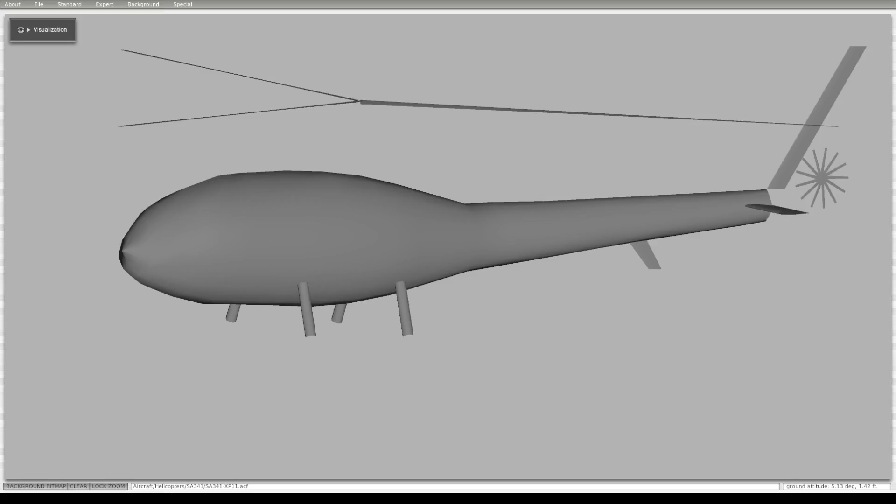So I guess the first thing that I really need to do is I need to get back into my side view, shift my view around, and I'll get my background images in there again, so I can properly try and align this under helicopters, SA341, doc, side. There we go. Alrighty, now what I have to do here is I have to zoom and move this around so that I've got it just so, and I think that's, no, that's definitely out a bit. That's looking a bit more like it.

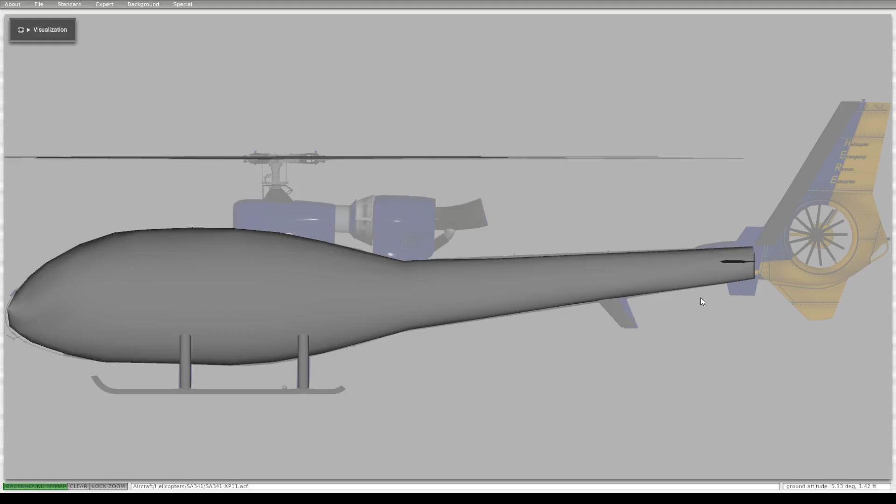Yeah. Alrighty, so what I'm going to try and do tonight, I'll probably only stream for an hour or so, but I might try and tidy up some of the polygons in here, as well as making this main rotor area and the engine cowling that we've got going on here. Got 2 bits of engine cowling. And I've seen some other helicopters actually use engine housing for this area here as well.

Another thing that I can do to assist is if I take that off and actually put the 3D model in there so that we can see how that operates. But it's always good to start with the background image. So I'm going to do that. Okay, so if we go into standard engine pylons, no, that's not what I want. I want fuselage miscellaneous bodies, engine nacelles. Right, so the body has this engine nacelle,

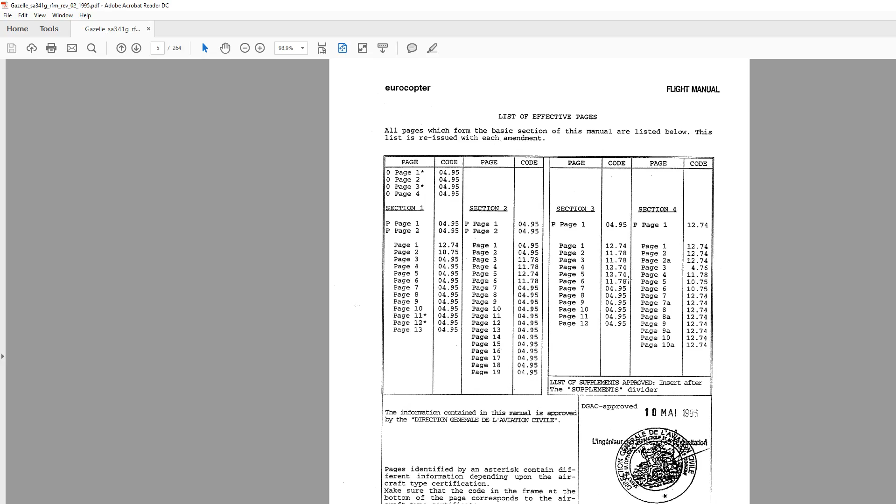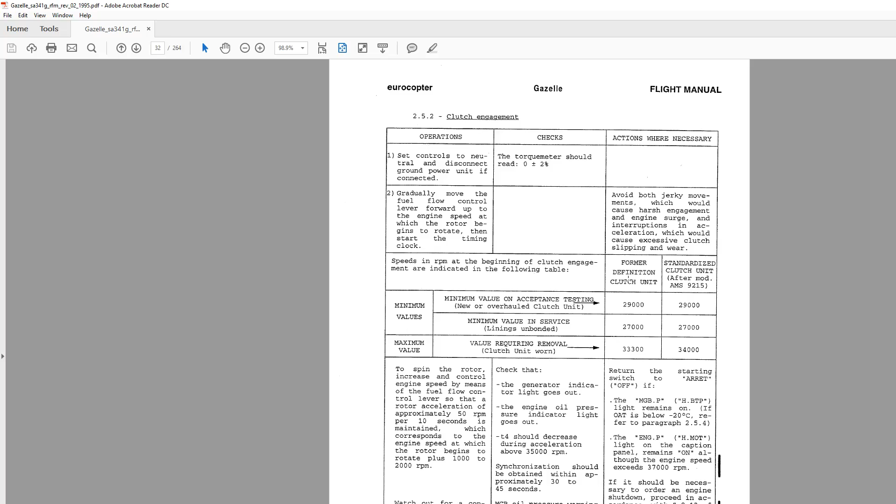and this is a really important thing to set first of all, is the number of stations, number of sides in the radius, and the body radius there. Now I'm probably going to have to guess here a little bit as to what those dimensions should be. So I've got a couple of documents here. So if I swap over here to the left screen and bring this back up, this is the documentation that we've got for the Gazelle. I don't think they actually have a lot in the way of dimensions for the engine housing. So that's what I'm just looking for.

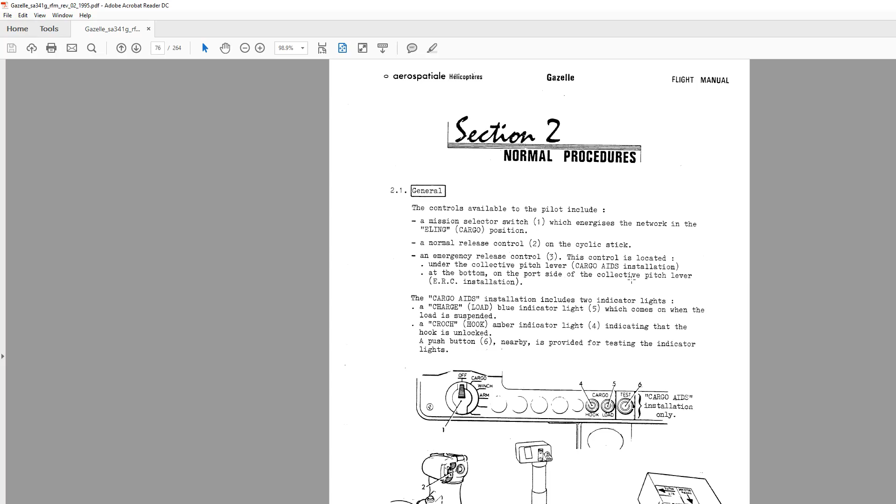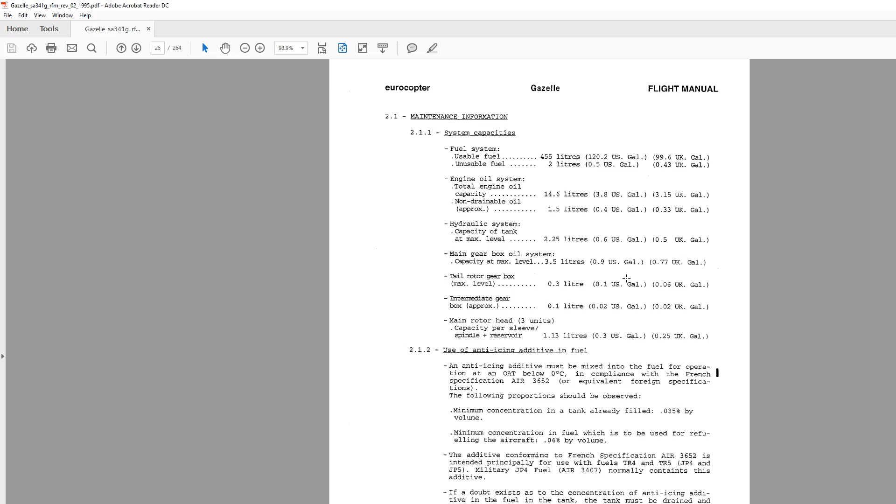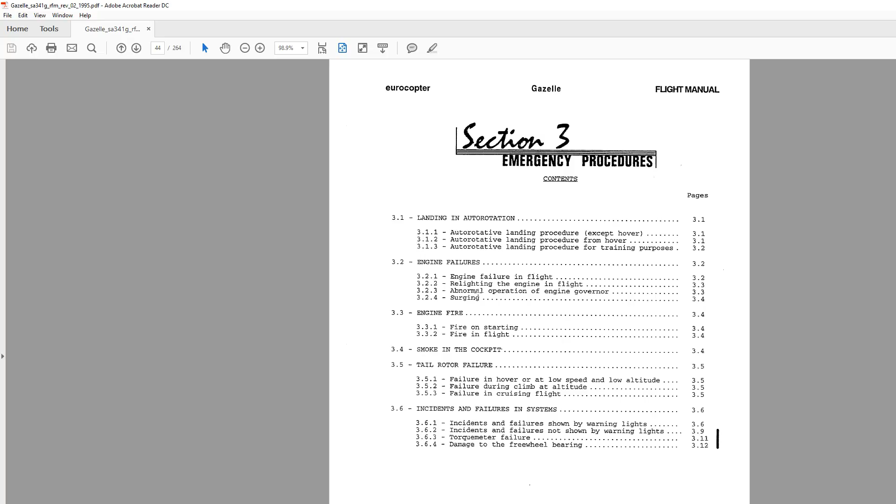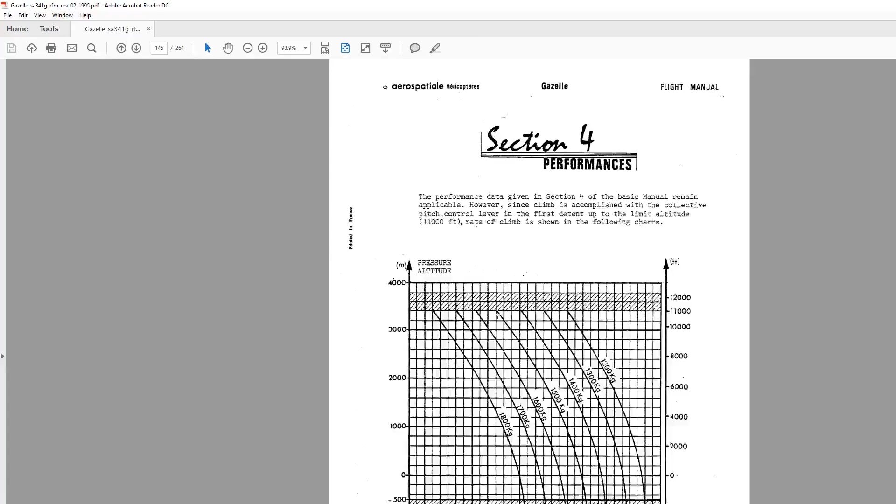I'm just going to one of the sections that I know that has limitations, normal procedures. Oh, these are the auxiliary additions. I think it must be back here. I think it's actually in section 2. No, section 2 is normal procedures. Must be section 3. No, that's the landing procedures, and that's the emergency procedures. So section 4. Correspondence diagram, no. These are all the diagrams. So after all of the supplements, because I'm sure I did go through this previously. Oh, there we go.

so that's 1.4763 feet body radius. So we actually need half of that, so it's going to be 0.735. So if we go 0.74 as our body radius. Number of stations. Well, for this engine cowling, I'm going to be tackling it in a couple of sections there. So I might try this main housing here first, and I reckon I'll probably need 1, 2, 3, 4. So probably going to need about 8 stations, to be honest.

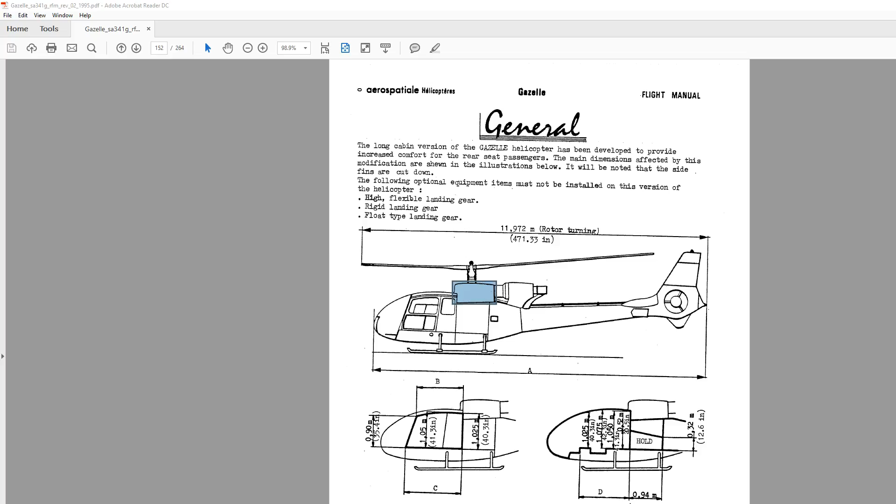Alright, so if I go 0, then 1, 2, 3, 4. This is in feet, so this is 5 feet, 6 feet, and 7 feet after the reference point. Now this is all collapsed into a single point here. What am I missing? Alright, that's the lateral. This is the vertical. I'm missing something here. What am I missing? Why is that fully collapsed? Here we go. Okay, so we can get back to 0.74 of a foot. Sorry, I'll swap that back to the main screen here.

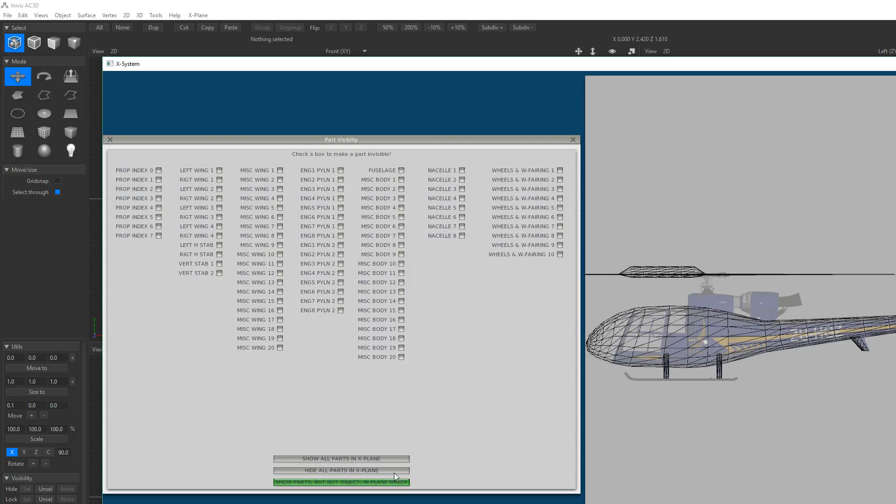So let's go back into the engine nacelle, and the heading offset, I believe, is, sorry, the pitch offset is what we want there. So 90 degrees. Okay, and so there we go. So we're actually seeing it rotated around the right way now. Now, if we have a look at the 3D objects, we'll bring this back in. I'm going to rotate this around a little bit. What you may or may not be able to see is that it's actually got the intake in here. So we need to try and model that intake with what we're doing there as well.

Oh, I forgot to lock the zoom. Alright, so let's get that back into the side view, and we'll get that back into position. Just needs to be a bit. Alright, that looks. There we go. Okay, so that looks right. Make sure that you lock your zoom, otherwise you'll have to do that again yourself. Okay, so I'm going to move that down there. So this is, I believe, either my center of balance or my reference point. I'm not 100%, but ultimately I want to move this down and I want to move it over to the right there. So yeah, let's go and have a look at that.

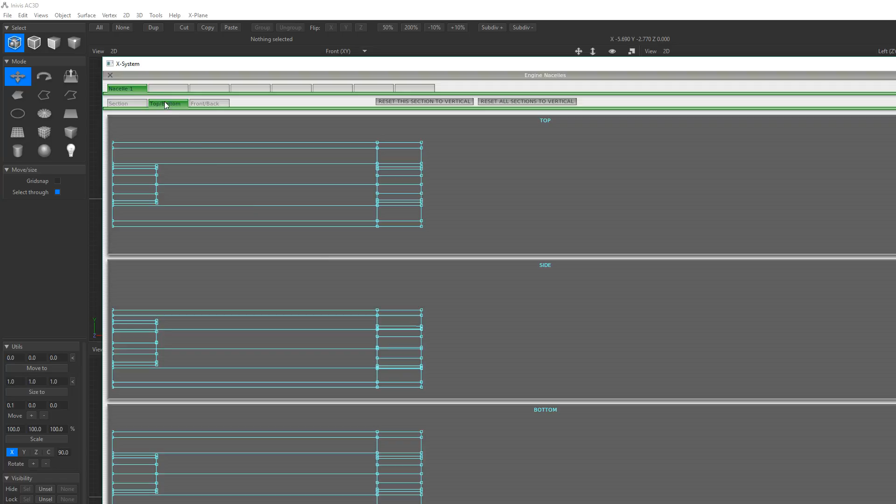I'm going to try now and try and shape them a bit more. I can load a left background there, and I'll go my side 600, which is what I used. Yeah, okay, that's not really going to help me at all, unfortunately. Alright, I think I need to move all of these points down. There were some of the biggest ones there, so that is my side view. This is actually really quite difficult to get just right.

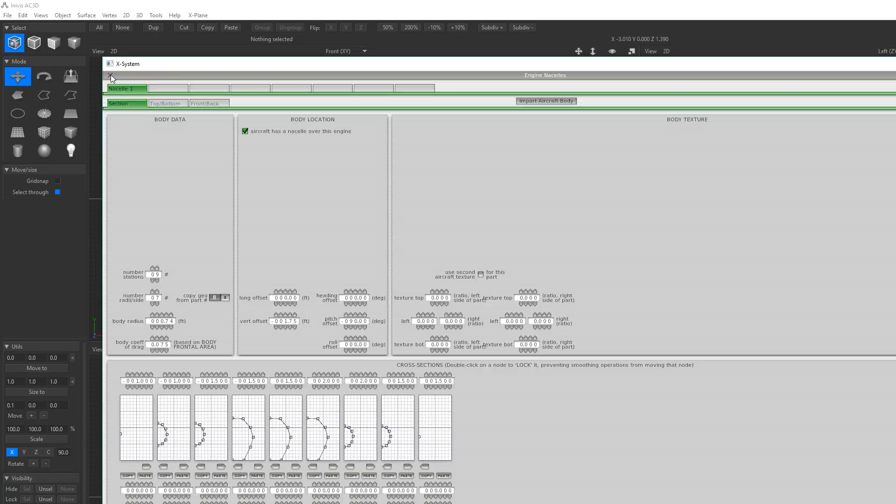I believe I also want these points to come down a lot more, and I think overall, got here? 1, 2, 3, 4, 5, 6, 7, 8. I wonder if I need more points. Don't know. Oh, we just do what we can with what we've got here. And this is all learning, so it's all about finding out what these things do and how it all works. Alrighty, so we can see that that's actually come down a bit. So I'm wondering maybe I'll move it down.

So engine nacelles. Because I think with this body radius, this actually determines the space that these areas embody. So if I'm looking at this and I'm thinking, because I need to take into account that it's basically like that area there. That's really the width that I should be looking at there, and I'm really thinking I probably need to double that. So I might need to come back in here to my engine nacelles, and maybe I do go 1, 4, 3 and pop it in there.

And you see how these have shrunk down, so I've got a lot more spacing in there to control my geometry. It's still not really helping me there. Reset this section to vertical. Alright, so now I've got that bigger area. I can move these points. Now this is the back area, which is good because that's kind of what we want to dig into here.

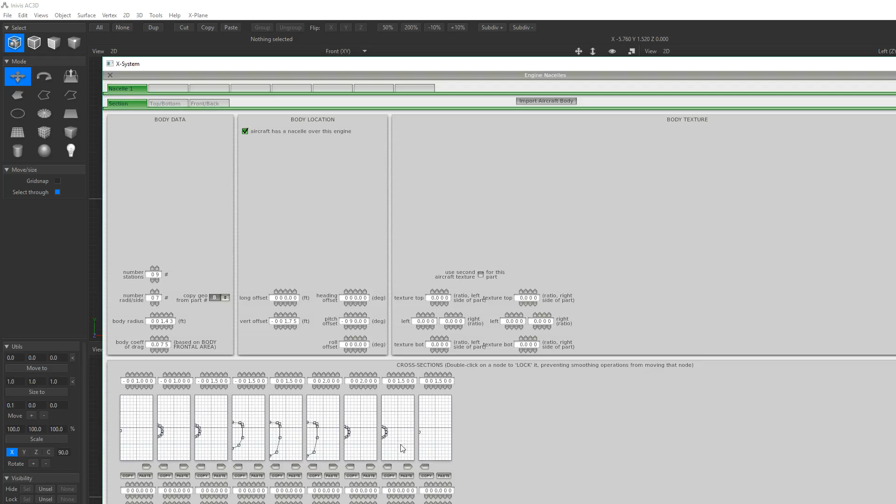All right, so coming back to our fuselage here, I wanted to move this point out. So I've got to remember that this is not my last point there, because I've actually got that intake coming back in. So it's this point here, and I wanted to move it forward 2.125. Alrighty, there we go. So that's moved forward to around about where we want it there.

What I might do though is I might move all of those points down a little bit. Oh no, I'll leave that intake there. Or no, I'll move the intake forward as well. All right, so engine nacelles.

So Jerry, if you're just joining me, I'm actually helping to convert a SA 341 Gazelle that was made for FlightGear to X-Plane. And so I thought, well, let's jump in the deep end.

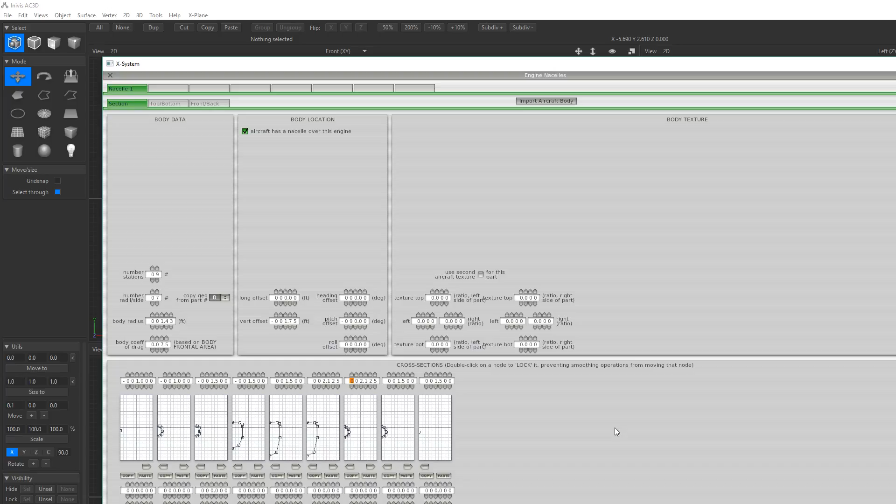All right, so that was 2.125, and I'm going to set that to 2.125 as well. So that moves that forward. I was going to move all of those points down as well, but I'm actually fairly happy with that. I don't know if I want to do... Sometimes it's good just to let sleeping dogs lie, as my dad used to say.

And if we have a look at the top view there, actually that's... Oh, I can't... It's such a pain that I can't do...

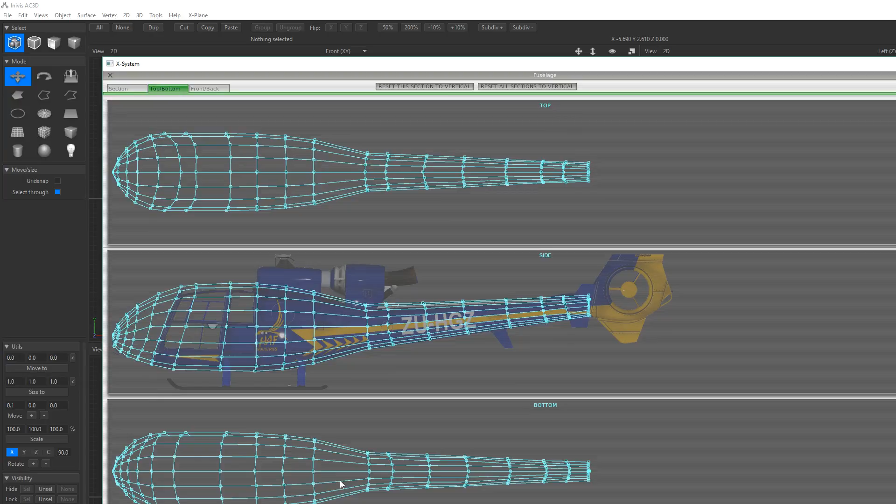Such a pain that I can't actually edit these directly, and I think I'm gonna struggle with that, to be honest, because it was quite easy with the fuselage. What I was able to do is come into here. I was able to adjust this to the right spacing, and then you go lock zoom, and then your background actually zooms with the item, so you can zoom right in, and it'll actually scale the background image with it, so you can move these points a lot more easily and a lot more readily.

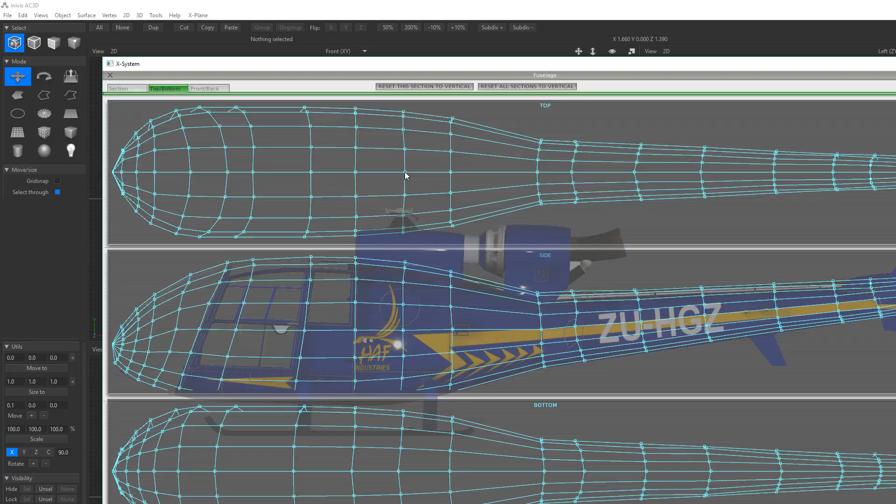Whereas with the engine nacelles, I guess I just need to size it appropriately. It looks like we can do that, but maybe I just need to zoom in on that a little bit more. Yeah, all right, let's do that. Let's open up the GIMP. If you haven't used the GIMP, GIMP is a great freeware image manipulation tool. Because I'm cheap, I can't afford to pay for Photoshop.

Alright, so let's go ahead and open our side view. No, I don't want our side view, I want our top view. Well, probably should do the top view as well. Anyway, let's get the top view first of all. And there we go, there's our top view. And you can see here, this is the area that we want.

Now, when you're doing your sizing, it's important that the dimensions are kept the same. So you see here it's 2482 by 600, and this is 2485 by 826, so it's the horizontal there that we're really looking for.

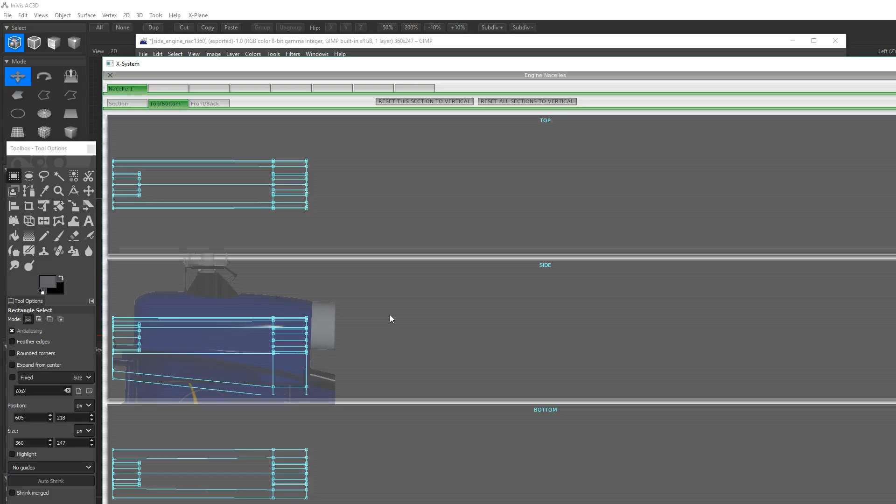We'll export that, come back to Plane Maker, and let's see if we can't rescan that. Unfortunately it puts me all the way back, so I've got to go back to aircraft, helicopters, SA341 doc, side engine nacelle. Yeah, look at that. Alright, so I want to take off the lock. So if I lock that zoom, yeah, I'm thinking that that's too high.

Alrighty, so let's get in here and we'll pull it down. So let's go back in there and we'll crop to selection and we'll export it. Slide that again and open that up. There we go, that's a bit better. So what I'm trying to do now is move that into position. So that, I think, ooh, that's looking good. Whoop.

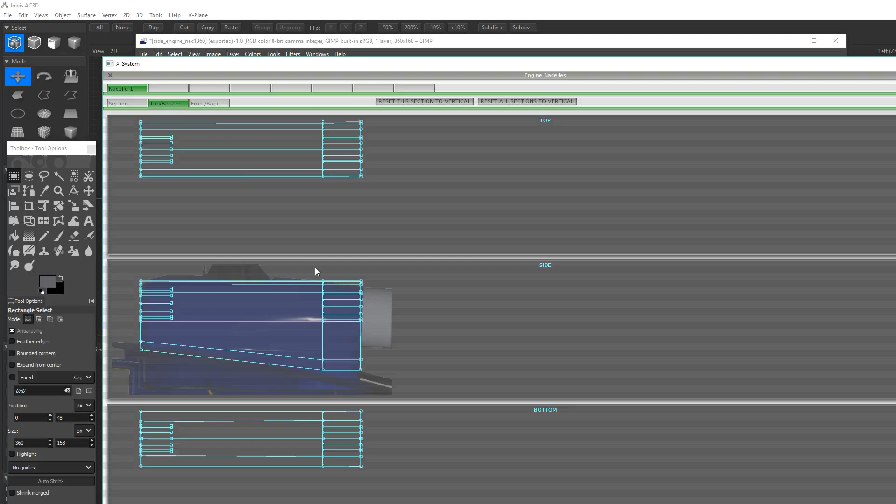I think that's about right. So if I lock that now and I come out of here and I go back into my side view, alright, so in my proper view here, that leading edge is below and that one is just about right. So if I come back here to my engine nacelles, oh, I didn't have it too far off. Whoop. Undo that. Undo, undo. You're gonna be a pain. Alright.

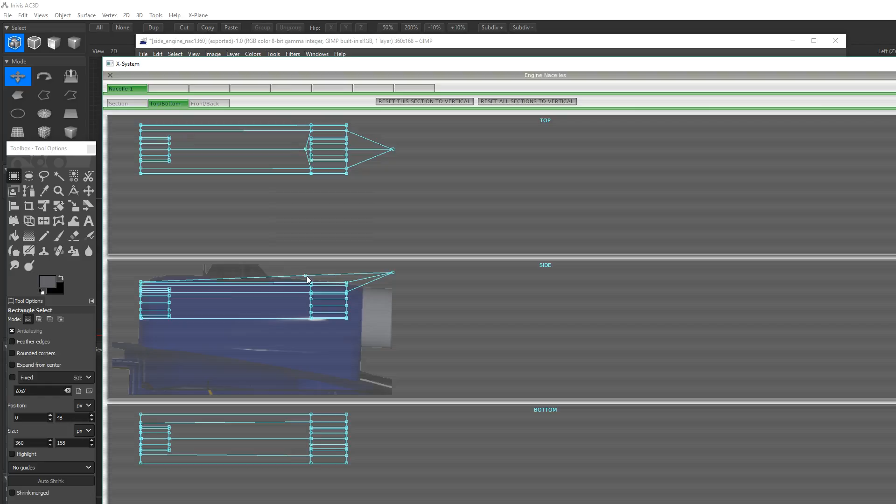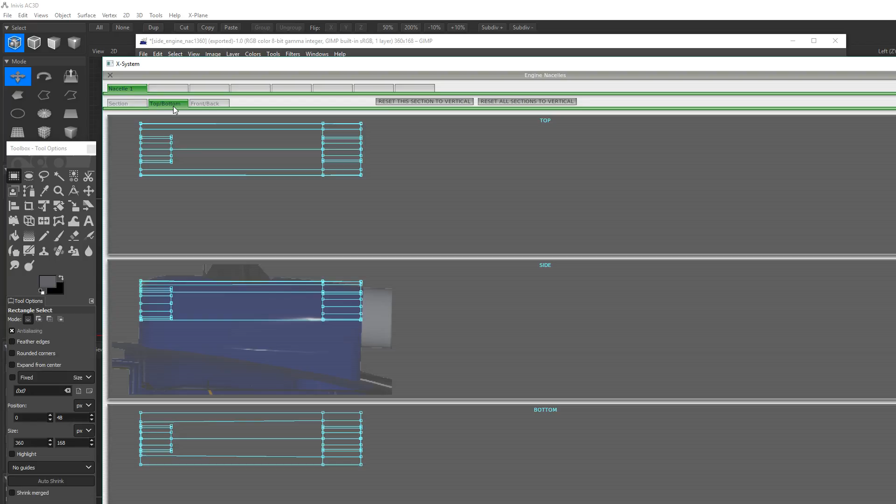What's going on here? Why is that all over the place? Alright. 1.43, but I can't manipulate anything here now. Wonder what's going on with that. That's not going to do me any favours at all.

Now the other thing is, what happened to my... Oh, they got squished up. So I've got to pull them down again. Huh. Alright, well, that's at the front there. We want that. And about halfway. Interesting. There we go. Okay, alright, let's get on with it. Let's build this out.

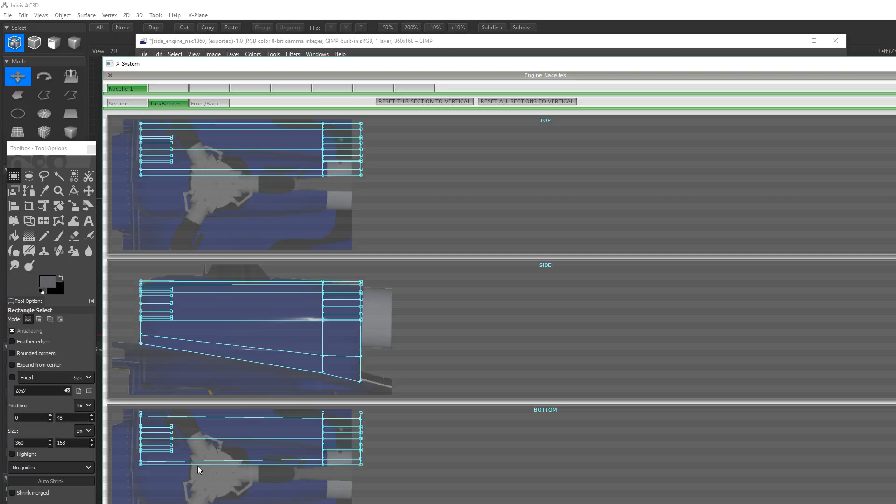It's not letting me set any lateral. There we go. Reset editing offset. Okay. Can I? No, it still won't let me set any lateral. Well, it's got it back where I want it now. So I guess I just need to move it back.

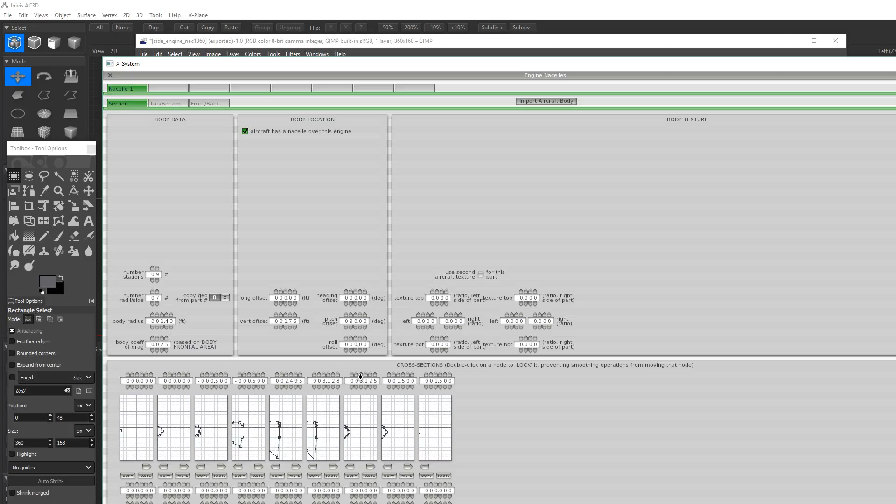I would have thought this vertical offset point would be the same. Alright, well, looks like I need to reduce that all by a foot and increase that by a foot. I'm not quite sure what's going on, but alright. Okay.

Yeah, I think I'm getting really confused here. Blind leading the blind, hey? Oh, lordy, come on. Back in your box. Okay, that's really frustrating. Alright. I don't want to lock the zoom.

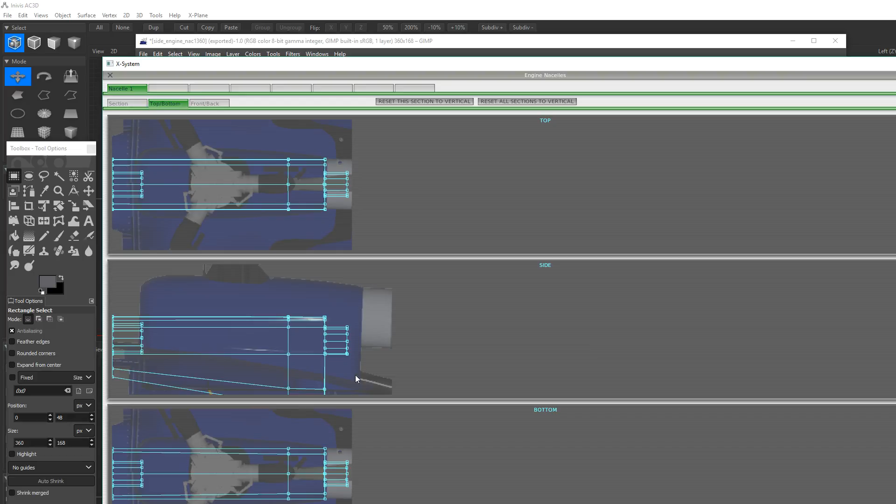I wonder if that's what I should be doing. I should be having this as flush to the leading edge there. Alright, let's try that. So it's going to reduce this down to 325, so yeah. Crop to selection. Yeah, no, that's about right. Crop to selection, and we will export. Yeah. And that is now 325.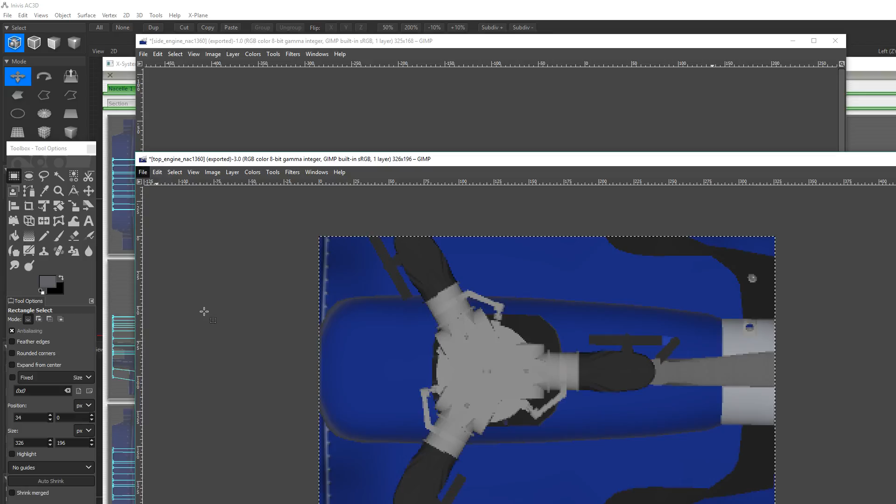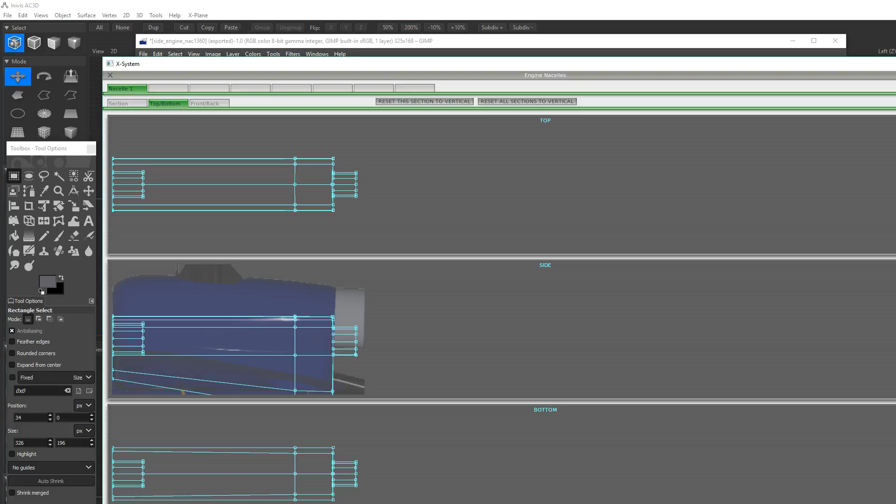And our other one should be here. Selection. So let's clear those bitmaps. Side, open bitmap. Okay. I think the big takeaway here is that this is quite a bit more rounded than what I thought it was.

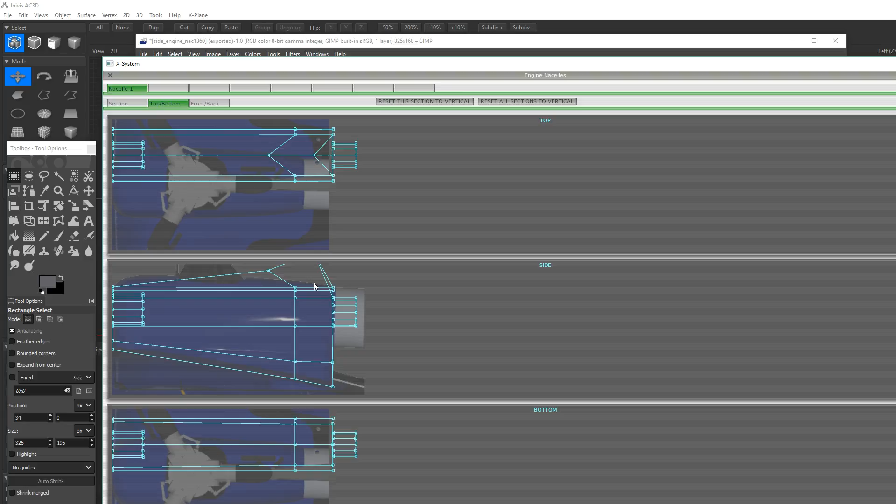Alright, I think I'll sort them out shortly, but what I want to do, I want to add maybe another 2 sections in there. So we've added 2 more sections. Maybe there and there. Yeah, because I've only got one engine, I'm only going to get one engine nacelle. So I probably am going to have to do this all as one thing. Alright, well, let's just suck it and see, as they say.

Alright, let's expand that out. Because I'm trying to get this overall shape here. And this shape should actually be inwards of that one a little bit more, so we can see that that's our furthest edge, and then we've got our inward edge. So we're just trying to make something smooth here. I reckon I probably should put another one there. So let's go for another one in here, and that will be right about there. Yeah, it's about right now.

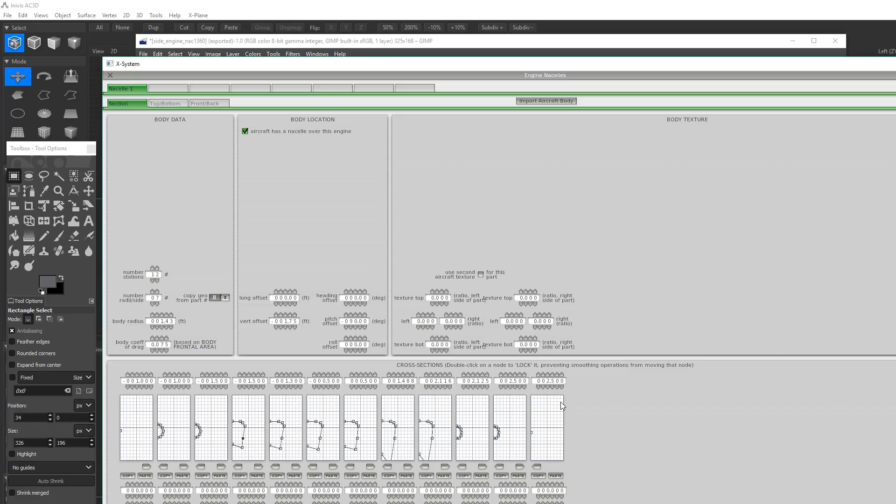Definitely got more of the shape there that I want to see, but I think some parts I've actually lost. Oh, that's because I didn't lock the zoom. I changed my zoom, didn't I? Yeah. So my sections here. So that should actually be 2, 0. So that's receded. Yep. There we go. Makes more sense. Okay.

Why do I have to do this again? I've got no idea. I thought I had it all sorted, but no, apparently not. So anyway, it's just more learning. Learning, always learning. If we're not learning, then I guess we're not living, are we?

Right, now with this I'm thinking that I'm definitely going to have to extend that out. Try and get that rise there. So what I'm trying to get there is that just rise and then how it tapers off there. So all of these should be roughly in the same position, because this appears to be, well, you might want to have a little bit of an edge to it, I guess.

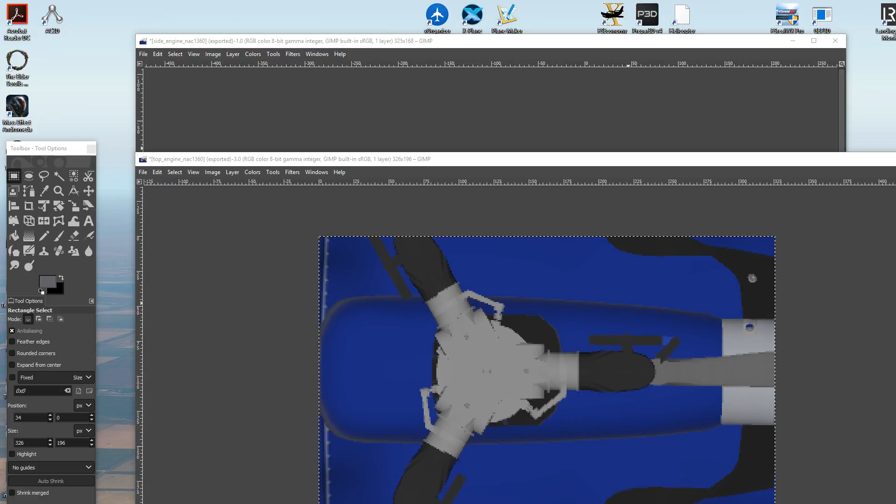So if I save that, can I now actually get that into X-Plane? Let's see how we're going. What are we going to load up? We'll go to New Zealand. Go to my favourite at the moment, Whenuapai military, just outside of Auckland.

Alright, Jerry, is there a lot of static on the mic at all? Or is it sounding okay?

Alright, I'm just waiting for X-Plane to load in now. And obviously this is going to tell me whether or not I've got any issues with the model, with the dynamics. I think I really need to get that 32 gig of RAM update. We'll see how we go.